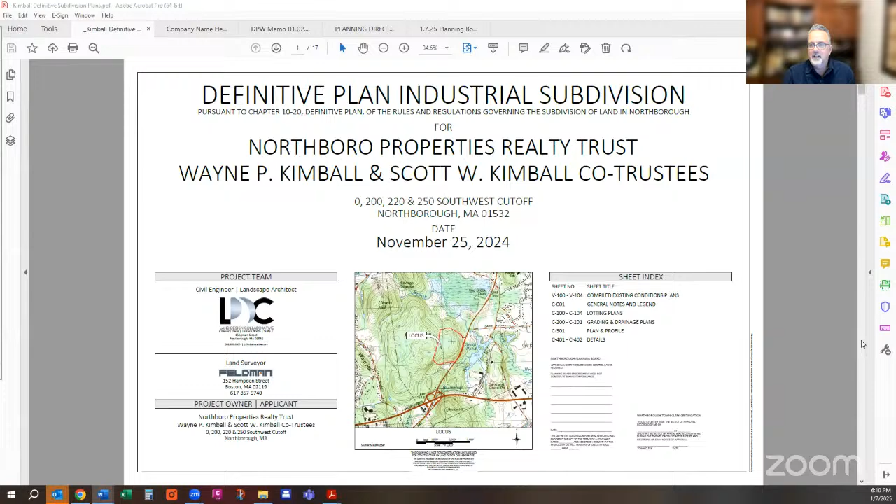There's not a whole heck of a lot of changes from the previous plan. This is the site, I'm sure you're all familiar with it. It's located on Route 20, on the west side of Route 20. For orientation, the plan is rotated, so north is to the right, south is to the left, and west is at the top of the page. This is the property, total of about 58 acres or so, located on the west side of Route 20. There are some undetermined or unconfirmed wetlands on the property, one to the northwest and another small one located in this area here. There's frontage on Route 20, and it also abuts the north driveway to Northborough Crossing. So that's an overview of the existing conditions plan.

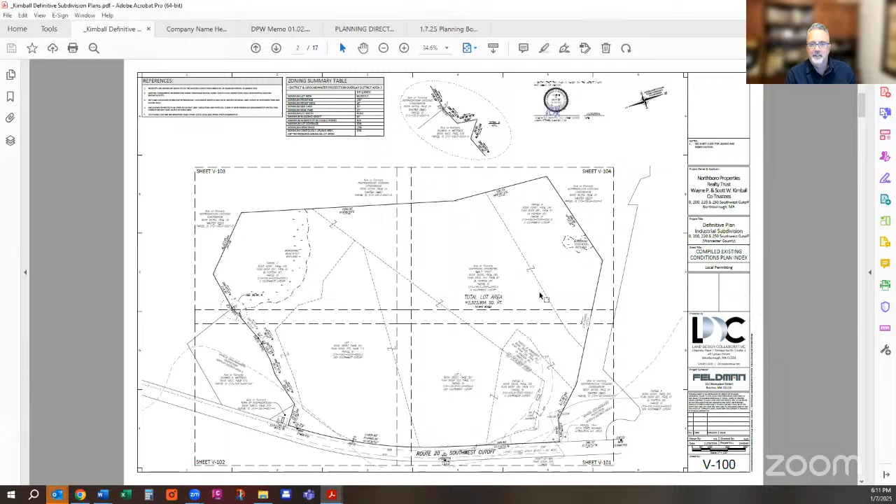Then we have some 40 scale enlargements of the different areas. This is the northeast corner of the property, an existing gravel mining operation, so the topography is consistent with that type of operation - lots of stockpile areas, as you would see here, lots of variations in existing grades, and they're constantly changing daily as they mine their material on site. That's the northeast corner. This is the southeast corner, again Route 20 at the bottom. And this is the northwest corner, which shows the wetland in that corner.

Wegmans and Northborough Crossing is located up in this area at the top of the page, at the northeast corner of the site. That's just the existing conditions.

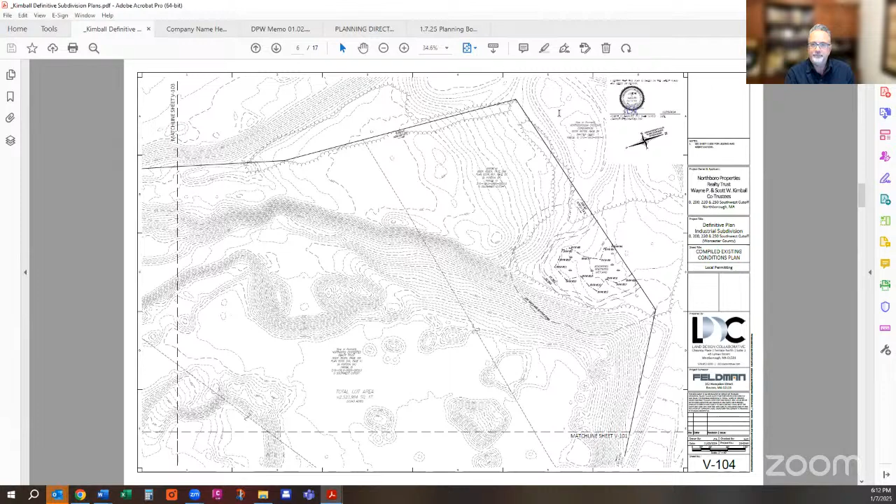To back up a second, there is an intermittent stream located in this corner as well. There is no riverfront area, there's no floodplain, and there is no natural heritage or endangered species on the site. The small portion of the site in the northeast corner is in Groundwater Protection Overlay District 3, shown here as that dashed line.

As part of the proposed subdivision, we're proposing to create simply just 2 lots off of a subdivision road, which is located in the existing location of the site driveway to the mining operation here. As I believe the preliminary plan, we had shown a 300-foot or so length cul-de-sac.

So the one change, or the couple changes, that we did make as part of the definitive filing: we shortened that road to minimize the impervious surface. The current road as proposed is about 185 feet now, so we did shorten that. And then we did reconfigure the lots slightly.

The previous plan had lot 1, which was a little bit smaller and kind of ran across the frontage of the site, and lot 2 was a much larger lot. So to kind of equally distribute the land between the 2 lots, we reconfigured that and made them a little bit more equal in size. Those were basically the 2 changes that we made from the preliminary plan: we shortened the road and we reconfigured the lots to have them be a little bit more equal in size.

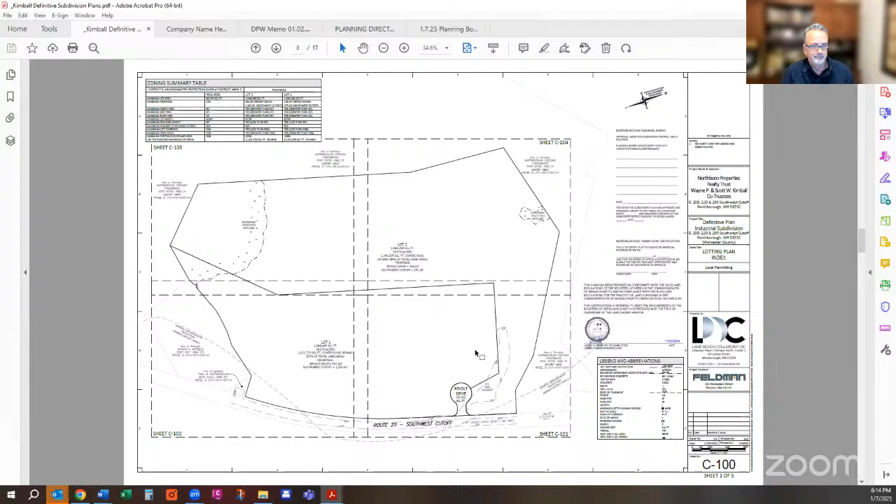This is again an enlargement, 40 scale enlargement of the proposed subdivision road. And then you can see the lot lines between lot 1 and lot 2.

Lot 1 is about 24 acres. 97% of that is upland, and it has about 291 feet of frontage on the subdivision road. And then it has several hundred feet of frontage on Route 20 as well.

And then lot 2 is about 35.5 acres. 85% of that is upland. It has about 156 feet of frontage on the subdivision road, and I believe about 250 feet of frontage or so on Route 20 as well.

So again, we're showing a 50-foot right-of-way with 28 feet of pavement width and a 60-foot diameter cul-de-sac bulb, with 50 feet of that being paved. There's a 4-foot grass strip and a 5-foot sidewalk on both sides with vertical granite curbing on the edge of pavement, basically designed in accordance with the Northborough subdivision rules and regulations.

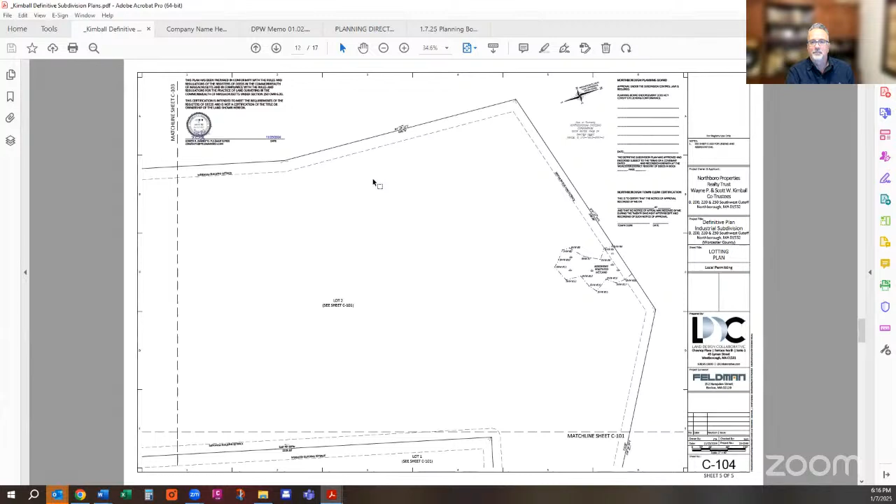As part of the definitive plan, we had to add more detail on grading, drainage, utilities, stormwater, so you'll see that as part of this submission as well. These are basically just the lotting plans with the bearings and distances shown. And this is an index sheet of the grading and drainage plan at 100 scale. It's kind of hard to see the detail of what's going on here, but...

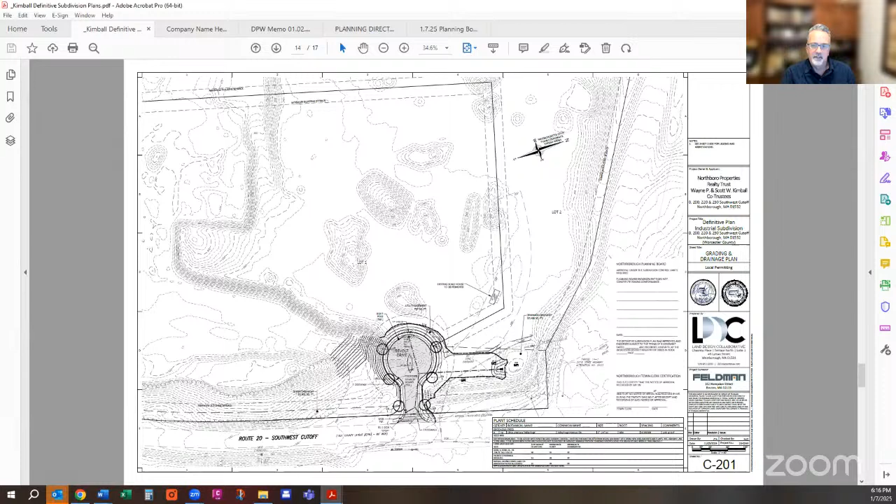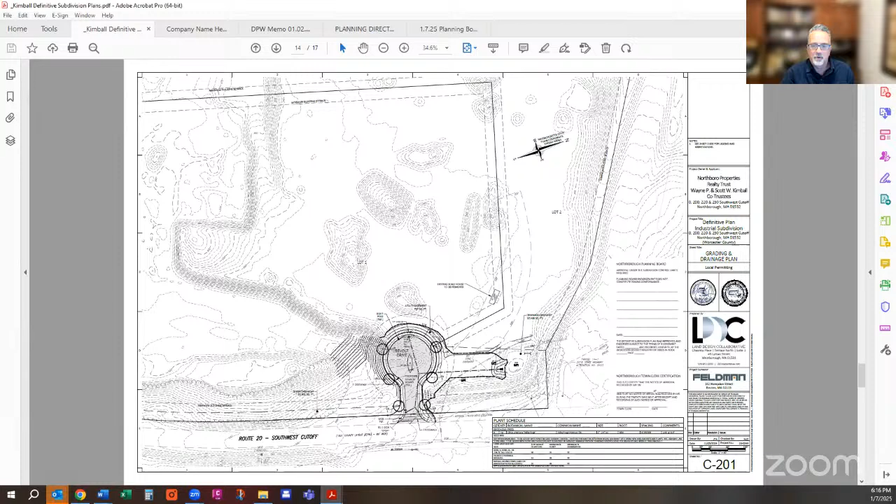Basically a 40 scale enlargement showing the pavement, the property lines, the off grading for the road, and street trees have now been added. Site lighting has been added. Drainage has been added with the stormwater basin shown in the northeast corner, which is the low point of the site, and it's in the location of where they currently are managing their stormwater. So we're trying to take advantage of that.

And then again, more details to the plans and profiles, which show more details on the utilities, grading and stormwater. Basically, the road is graded at a 2% slope up from Route 20 with a high point at the center of the cul-de-sac bulb, and then it gradually slopes back down again at 2% to the end of the pavement at the cul-de-sac.

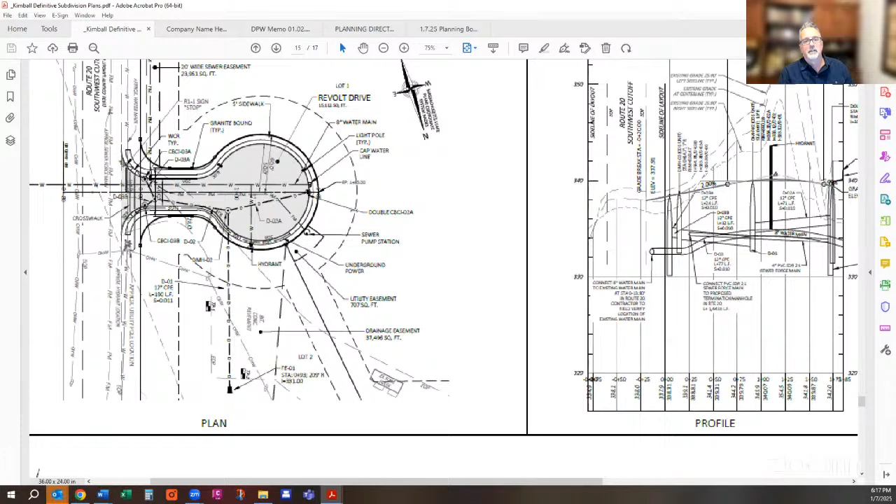We're showing a water main connection in the road. If I can zoom up on the plan here - we're showing a water main here with a hydrant located off the side of pavement. As you mentioned, we got comments from the fire department and from DPW, so there are some things we need to address with the plans, and we can go through that if the board would like. But basically, we're showing the utility connections here, all underground, as required by the regulations.

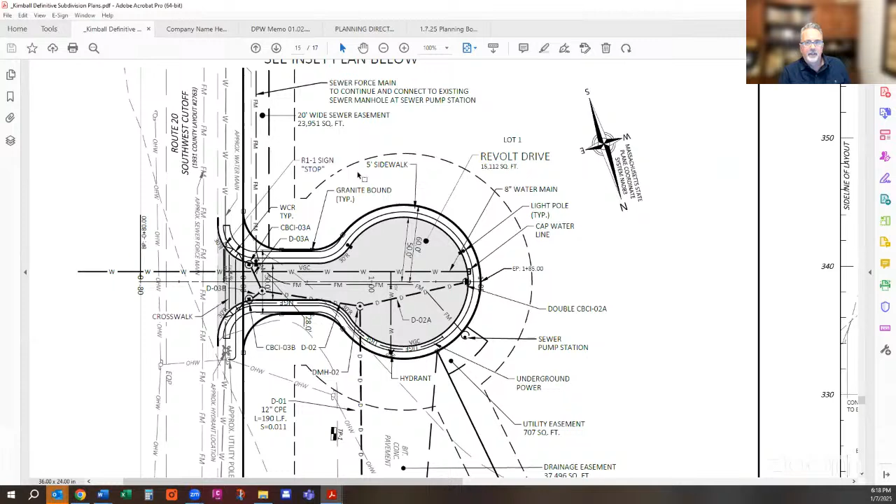So for wastewater sewer, right now we're showing a force main running across the frontage of the site. There is the pump station on Route 20, which abuts our property, which we're showing. So we had an inset showing basically a connection to a force main running along the frontage within a sewer easement.

Connecting to the pump station on Route 20. So again, depending on the final user of this site, which is undetermined, the site is conducive to on-site wastewater. That is another option as opposed to connecting to the municipal system. So it's kind of hard to determine which direction we would head in until we know what the final user is.

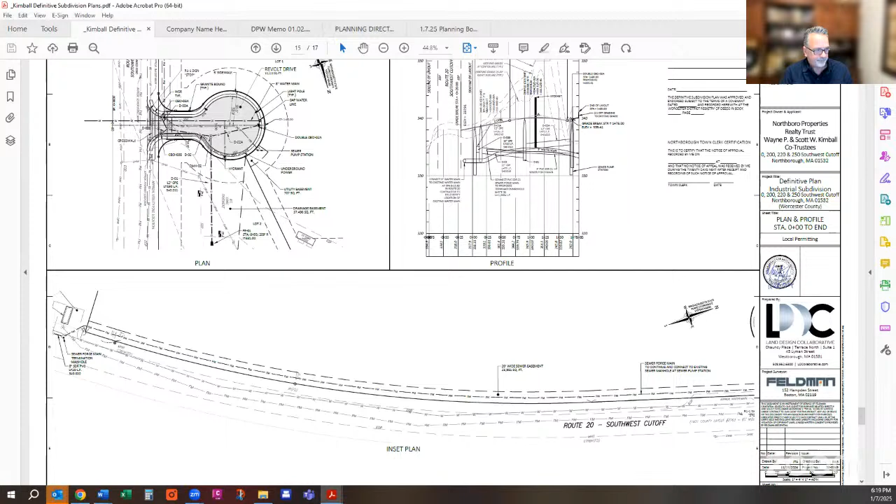But we did want to leave that option open for future development if possible. So again, just more details added to the plans - little construction details for erosion control, sidewalks, signage, pavement details, and then the Northborough standards for utility connections and other items.

So essentially that's the proposal. And again, as you mentioned, we did get a number of comments from various town boards or departments over the last week and as recent as yesterday. So we're working on pulling together a written response to those comments and wanted to get any additional comments the board may have, and basically respond to those comments in writing and then follow up with a revised set of plans to address those comments.

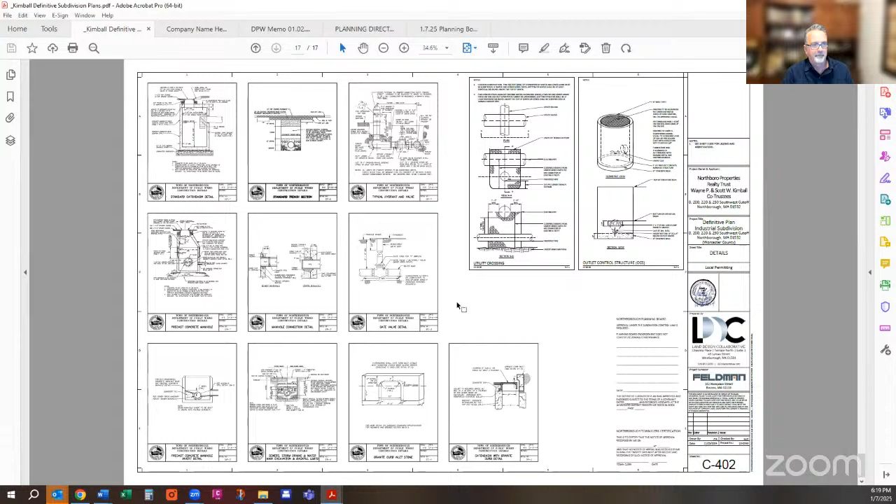Okay, great. So I see Vinny submitted a letter. Josh, did you have a letter as well at this time, or any questions? Yeah, at this point I did write a letter, just had a couple of comments - one concerning the water line, drainage calculations, and as-built plans.

Okay, so James, you have all of those as well. Would the board like any clarification on specific concerns, or did everyone have a chance to read the comments from staff? I read the comments, but I thought there were a lot of good comments, so I don't have any additional questions.

All right, sorry Josh, did I cut you off there? Were you trying to say something else? Yeah, I didn't make any comments on the sewer system at this time because, like you stated, there is a possibility to have septic systems put in. So I'd like to save those comments for when we get more information on what's going to go in there.

Okay, Laura, did you have any additional comments or questions? No, I did submit a comment letter. I did have a number of comments, although there was nothing really super concerning that I found on the plans.

Just requests for some additional information, an erosion control plan, some inconsistencies with the regulations that I pointed out, but nothing that I really feel like I need to highlight - unless Jim, if you had any questions about my comments, I'd be happy to clarify.

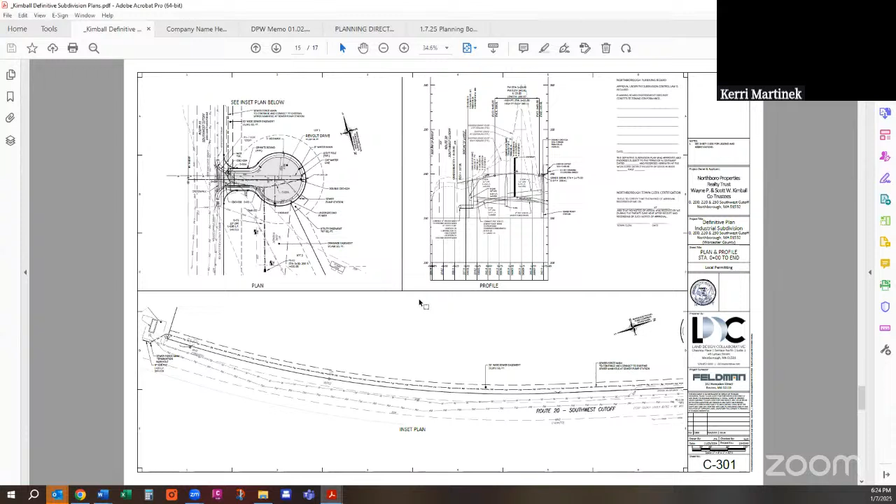Hi Bob. Just for the record, I submitted a letter to Lori today about the street name, and we have no objections. I just wanted to make that for the record. It's actually very appropriate because 2025 is the 250th anniversary of the start of the revolution, and Northborough is very proud of our Minutemen that marched to Concord and Cambridge in April of 1775. So for the record, we approve the name.

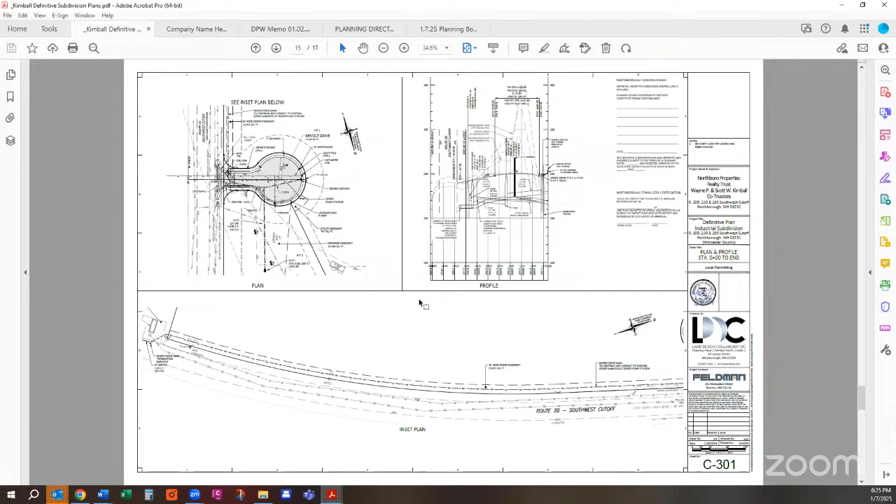Great, thanks for sharing that. That's really cool to know. Thank you. Did everyone on the board get a copy of that letter? I think it came a little later today. Okay, great, so we do have that on record Bob, and it will be included with the file as well. So thanks for bringing that up.

Any other comments at this time? Okay, I don't see any additional comments. Any additional board or staff questions? Okay, so James, do you feel like you have everything you need to come back around for next time?

Yeah, just a question for the board. Is it okay if we can work directly with Vinny on going through the stormwater comments and addressing those, or do we have to go through the board? No, I think that's standard, though not every town does that. Lori, is that pretty standard with interaction with staff? I don't want to speak for staff, but yes, absolutely, we'd be happy to work directly with you. Thank you, that's much more efficient.

Okay great, so anything else you need to clarify before we pick a time to continue? Is the board meeting twice a month or once a month? The first and third Tuesday of the month. So your options would be January 21st and February 4th if you're looking for the two nearest ones. If you need longer than that we could pick further out, but those are the next two. February 4th would probably be better.

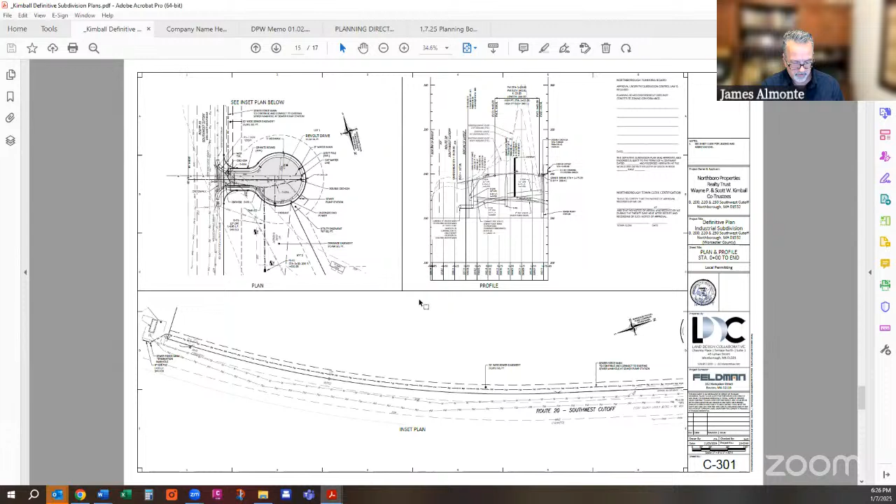I know Mike's on the call, I don't know if -- the bulk of work is probably going to be in his court, so if that works for him, I know he's texting me. Michael, do you want to vote on that? Does that work for you, February 4th? He might be muted there. He gave me the thumbs up. So why don't we vote to continue for February 4th.

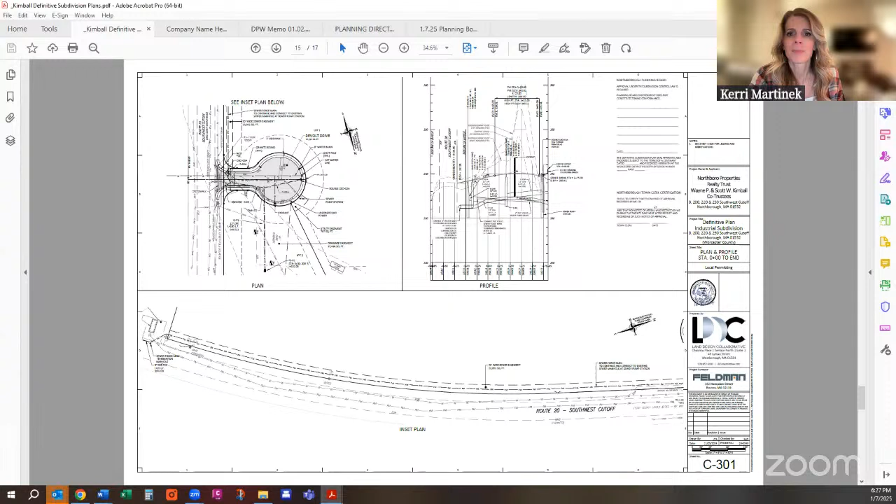Is there a motion to continue the consideration of the definitive subdivision application for 200, 220, and 250 Southwest Cutoff to February 4th at 6 p.m.? So moved. Second. All in favor? Amy aye, Millie aye, Anthony aye, Bill aye, and Kerri's an aye. Okay great, so we'll see you back on February 4th at 6 p.m.

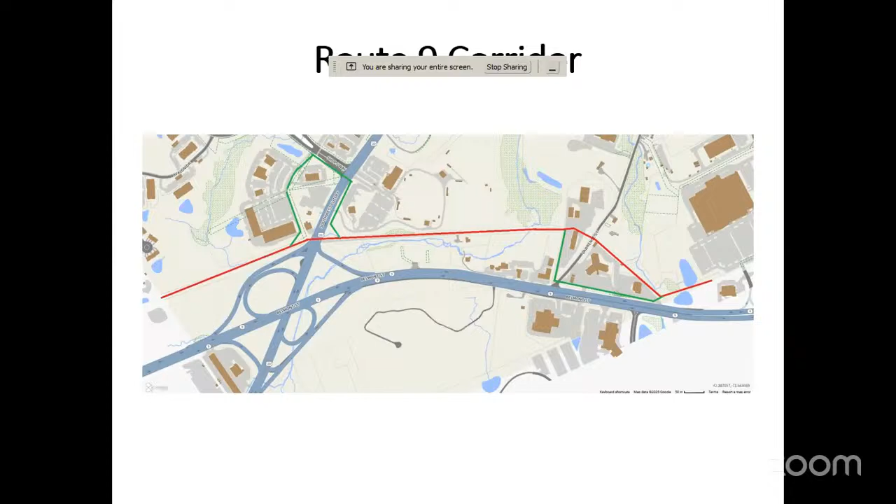This provides a good base link for other bicycle improvements, since I know your town is interested in expanding, at least according to your master plan, hoping to expand your bicycle facilities in town.

The trail would connect the beach on Lake Chauncy with the two recreational fields you have on East Main Street.

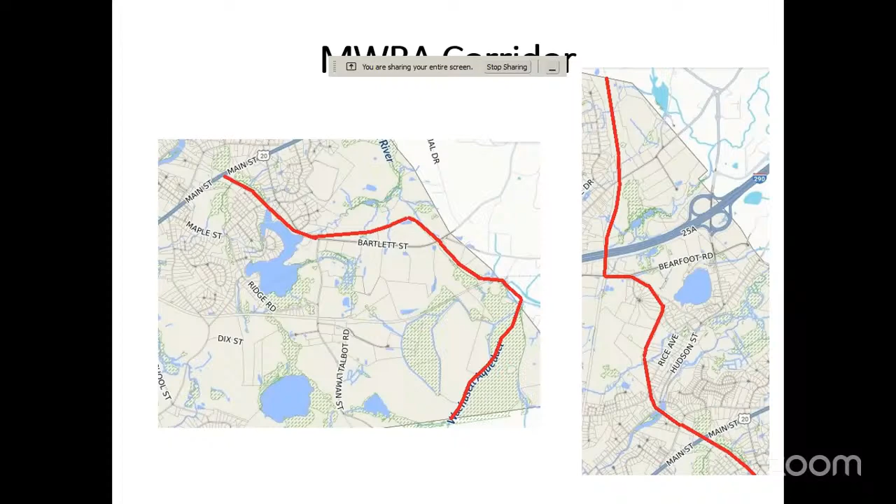It would provide Algonquin High School with safe routes to school for bicycling to a large number of areas. And it connects a lot of the open space in your town together, which is already being done with the walking trail that is on that corridor.

The first thing people ask when you start talking about shared use paths is, how are we going to pay for this? Well, the good news is that Massachusetts, if you structure things right, will pay for most of the cost of the trail. The biggest cost you hear about in other communities, like Framingham recently, or some other towns, has been purchasing the railroad right-of-way.

You aren't purchasing a railroad right-of-way in this case. Most of it is going to be on a few easements, and a lot of it's on state-controlled land already.

Westboro did a feasibility study using a Mass Trails grant and some volunteer labor. At the time, we didn't do the match, but you could actually do it with a match.

The 25% design is what's required by Mass to get construction money.

Again, Mass Trails funding up to $500,000 with a 20% match by the town if you split the trail into sections. It also means you can do it piecemeal and have more control.

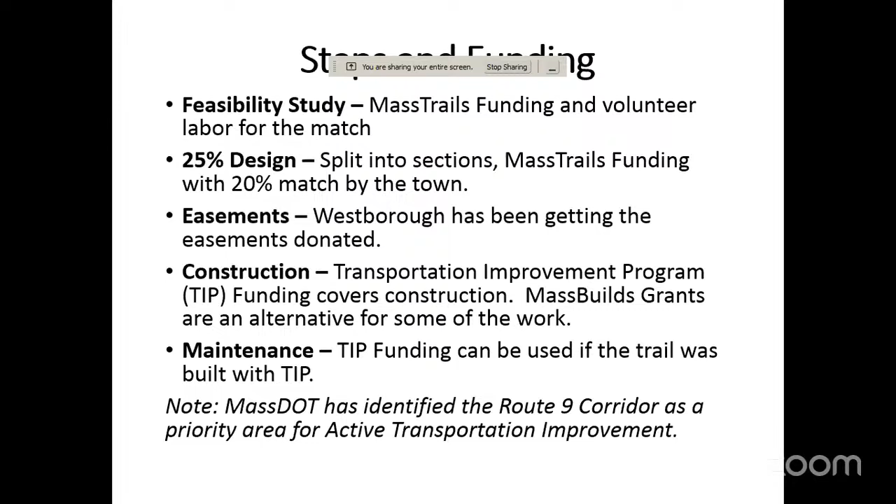The section marked 2 has a completed 25% design, and Westboro is looking in the future to do other sections for design using the same grant process we currently have.

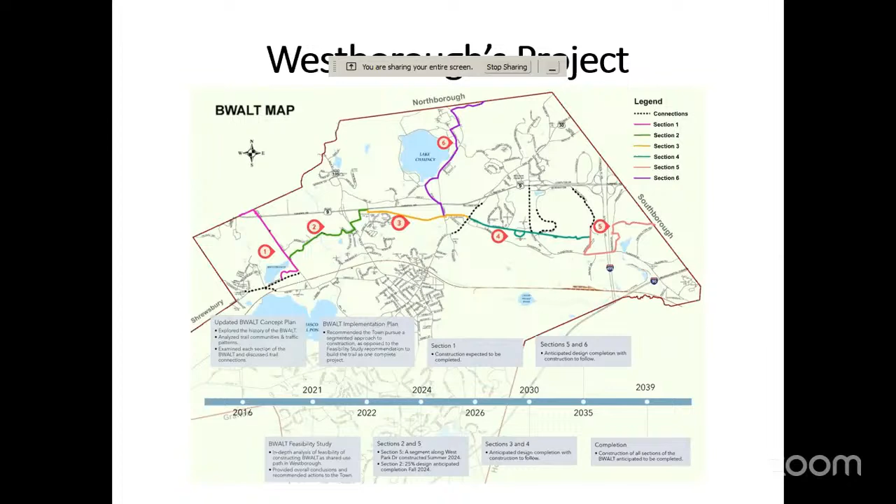I did those for Westboro as a volunteer. And if we set this up right, I will volunteer my funds, my money, and time. A local engineering firm I worked with, Waterman Design, has said if they are doing it, they would list me as an employee, but my salary would be contributed. Mass Trails has already agreed that is valid, so there'd be no monetary cost to Northborough to do such a feasibility study.

Wow. For the easements, Northborough is actually blessed - there are 7 agreements total needed with landowners. Compare that to any other town except Marlborough and Framingham, which both have to deal with a railroad company, so they have bigger problems. And that's very few easements.